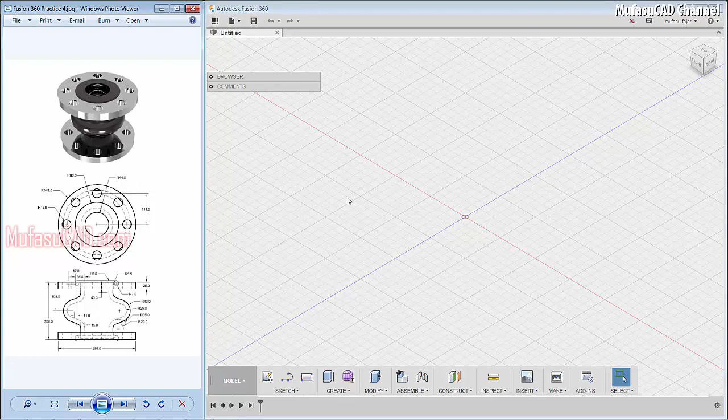We start now. Open your Fusion software. First I will create a line from the front view, click here to here and to the bottom. Next I will give the dimension, this line about 100, and this line about 12.

Next I will create a circle with a tangent. You can click here, click this line and this line, and radius about 5. Enter. Use a trim command to cut this object and this object.

And we give the dimension again, this line about 75, and this line about 7, and this circle about 5.

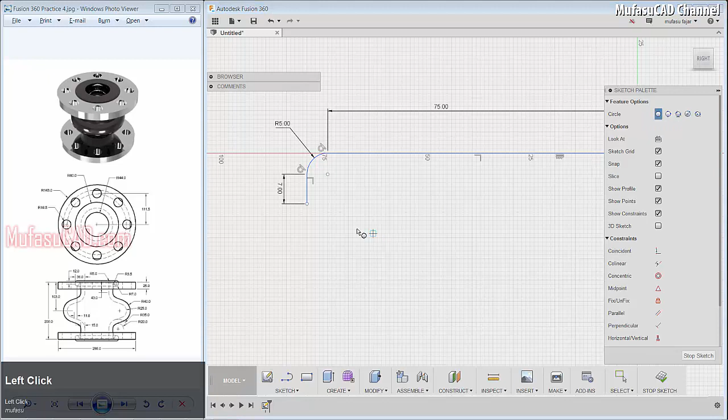Next I will create a circle with 2 points. You can click here, 2 point. First click here, and then with dimension about 14, type D. We give distance from the center point to here about 12.

Next I will create a circle here with dimension about 7, and I will give a distance from the center point to here about 12. And I will connect by using tangent this circle with this circle.

Next we create a line from here to here, and give the distance from this point to this point about 43. And then use tangent here.

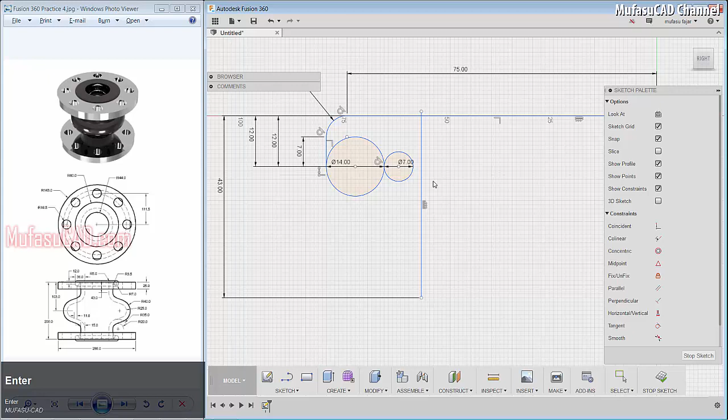We connect this line to this circle. Use a trim command to cut here and here, and we cut in here and here.

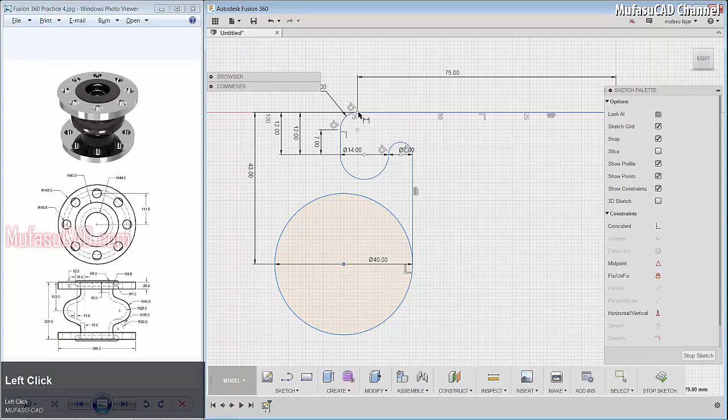Next we create a circle with 2 points here, from here to the left with dimension about 40. Then I will give a distance from here, the center point, to here about 43.

And I will create a circle again from here. We give a dimension, the circle about 80. Next I will move the circle with a dimension from the center point to this point about 108. Enter, and then we give dimension this center point to here about 11.

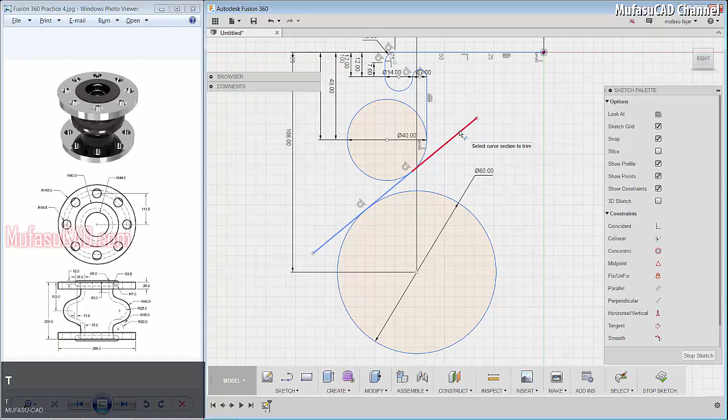Next we create a line from here to here, and then I will use a tangent to connect this line to this circle, and this line to this circle. Use trim command to cut here, and then cut in here.

I will create a line from here to here, and use trim command to cut in here. So we're using the offset.

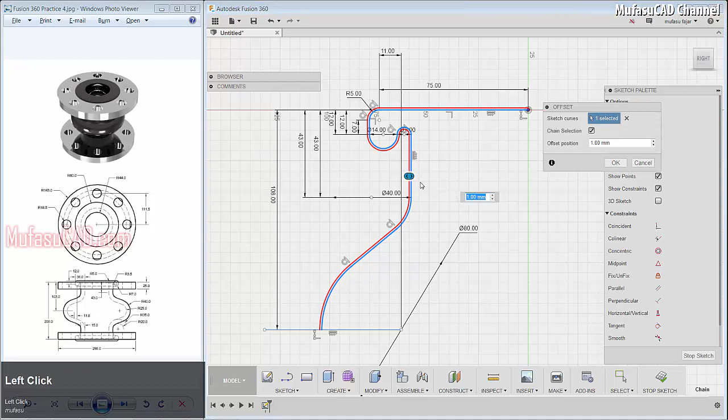Select sketch curve. You can select this object and move to the right about minus 15. And I will select this circle and delete. Click this point and move to the top. Use trim command, we cut in here.

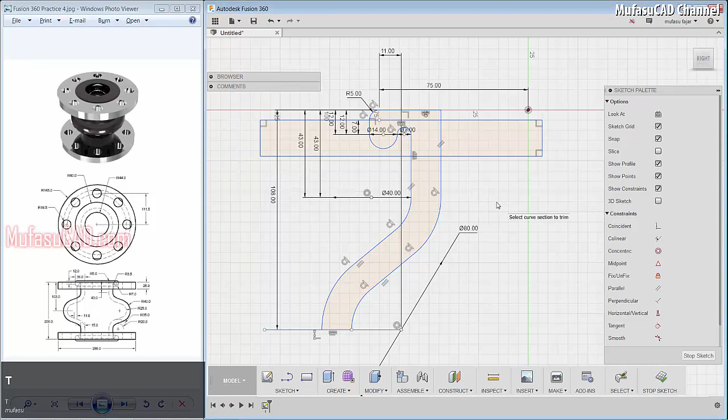Next I will create a line from here to here to here and then close here. I will use a trim command to cut here, in here and here.

And use a dimension, we give a length of the line from this center point about 143. Then we give a dimension, this line length about 25. Next we use revolve.

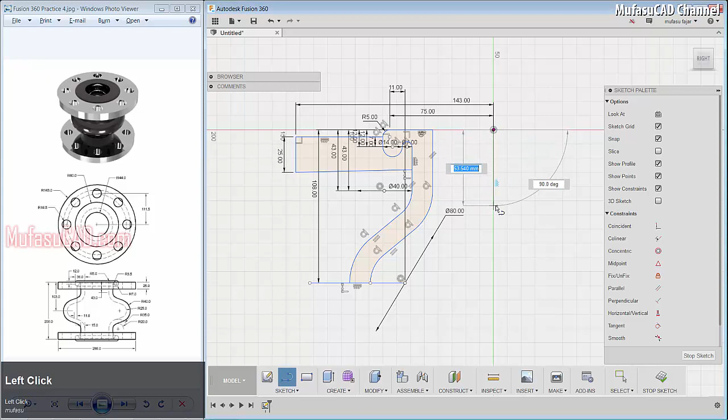First I will create a line from here to the bottom here, and we use a revolve. You can click right here and use a revolve here. Select this face to profile, and then for axis I will select this line. You can see the result.

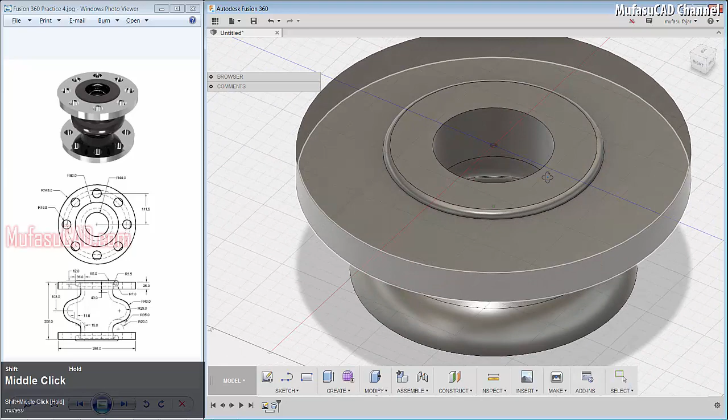Next I will rotate the object by using the orbit, and I will create a circle. You can select this face and press C. We create a circle here with dimension about 33.

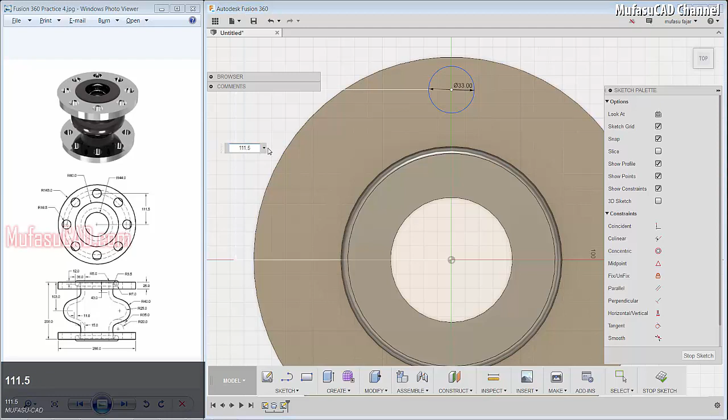Then I will give a distance from the center point to this center of the circle about 111.5, and okay, next I will use the circular pattern.

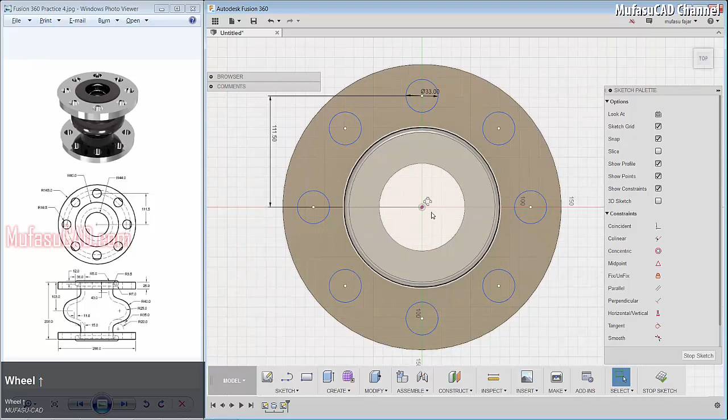You can click here sketch and click circular pattern here. Object I will select the circle, and center point I will select the center point, and quantity is about 8, and enter to finish. Next I will rotate the object here, and I will extrude this circle.

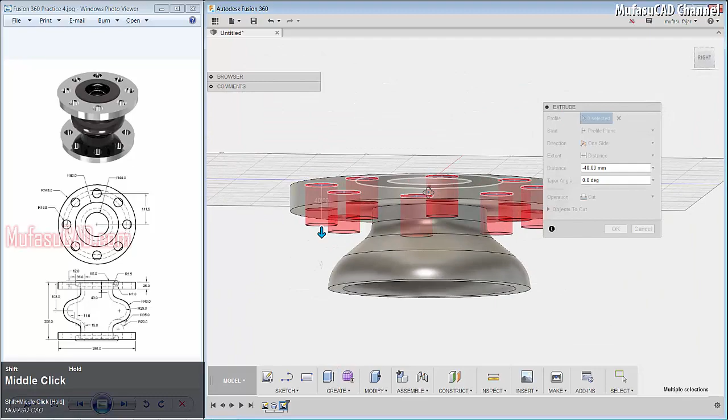You can select this face. We'll extrude here 8 circles, and select these arrows and move to the bottom. You can see, and enter.

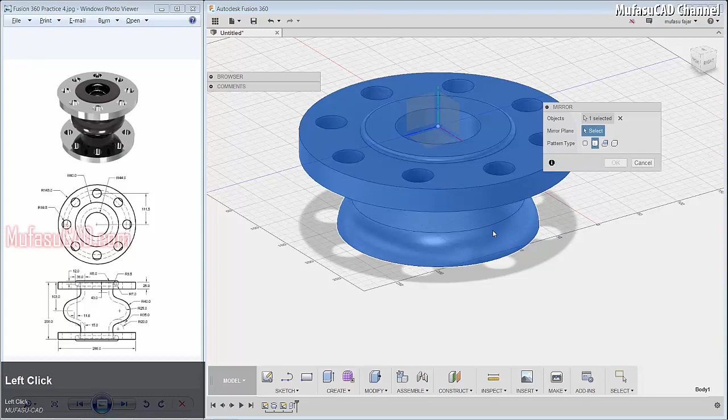Next I will mirror these 3D models. You can click here, create, and click mirror, and select object, select this whole object. I will change the mirror plane and change it to pattern bodies. You can click here pattern bodies, and click in here. Next, tap OK to finish.

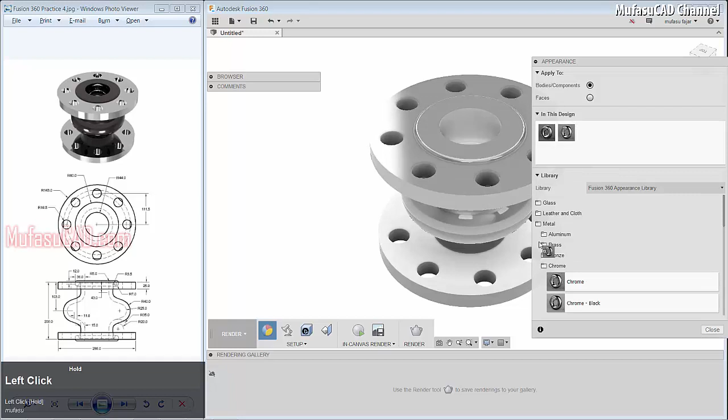Next I will give material. You can click here models and go to the top, render. Click the appearance here. I will give a chrome material. You can click here chrome, choose the chrome, and select this object, and click here and select this object, and I will rotate the object to get the base view for rendering.

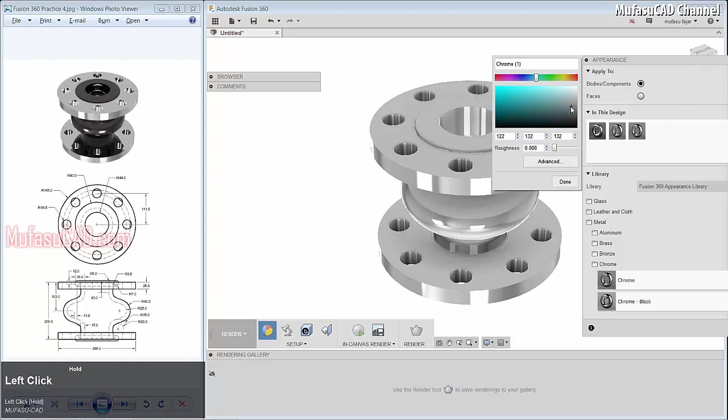Okay, and then I will click here and duplicate. Click here twice and change the colors to here, and advance. For roughness I will set up to 0.31.

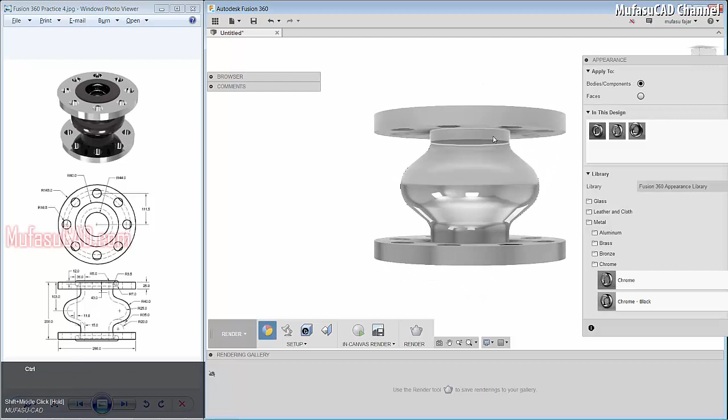And I will select this face in here and here, and move this material to here, and I will rotate and select this face again. Move material to here, and then I will select in here too, and move material to here. Next we rotate again.

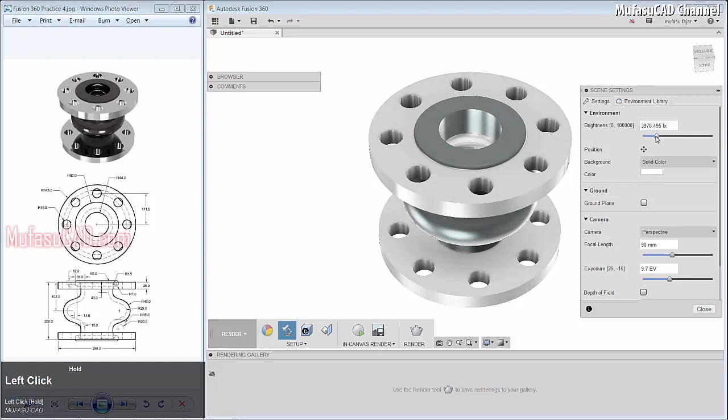And I will set up the scene. We will close here and click here for scene settings. You can set the exposure here, and you can set the brightness here, and then close.

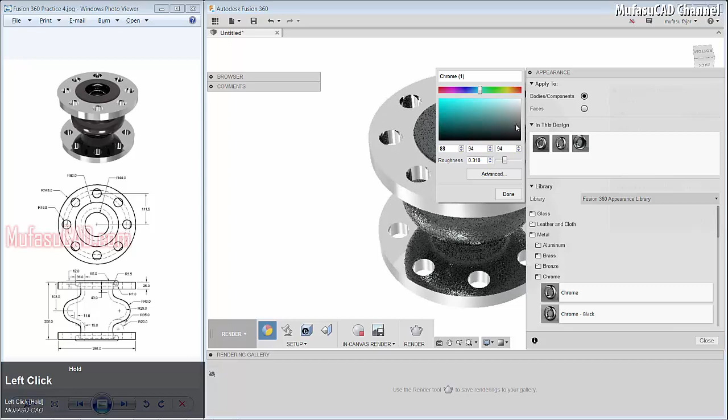We try to render in canvas. You can click here in-canvas render, and we wait for the rendering. You also can change the material when the rendering process begins. Click here and change the color here. Okay, and then you can click this face and give this material to here.

And you can close and rotate to get the base view, and we're waiting for the rendering until it finishes.